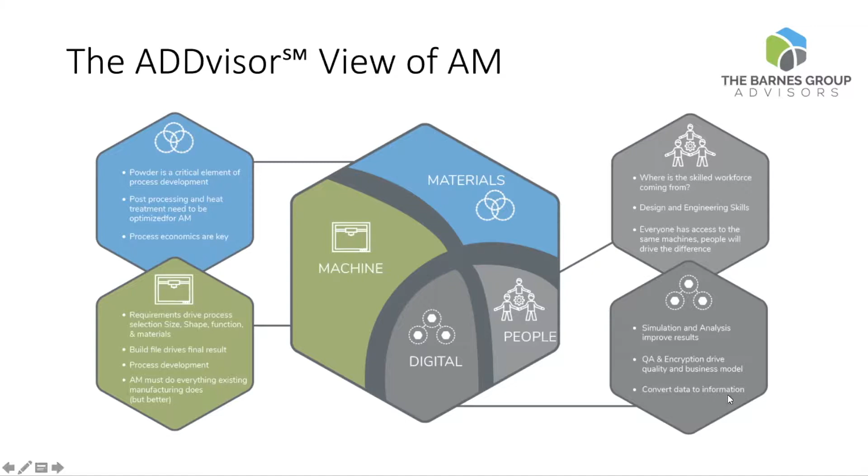So we talk about additive as a team sport. It's a very integrated capability. And if you look at a microcosm of that, just inside any type of powder bed fusion device that's out there, you'll see some combination of physics in terms of the optics, whether you've got a laser or electron beam. You've got an environment, you've got a gas that's going on inside. You've got mechanics of materials as you are building parts. You've got support structure. You've got dynamics going on as you're heating and cooling and doing that repetitively.

Then there's the metallurgy and material science that have to be matched with all of this to make it happen. If the materials aren't compatible, then you're not going to end up with a suitable product. And then there's a lot of the big data that's generated. There's a lot of analysis that goes on, and there's the simulation that we sometimes do beforehand. So this is a function of many things.

And then we've got powder manufacture, flow and spreadability, and that is distinct from material science, because this is basically how you get the material in there. How you produce the powder does matter. And things like how it's going to interact with the recoater blade. How is it going to get into place? How does it get moved around once it's in the bed?

The laser interaction with the powder is critically important. So we know we have to melt material. That's critical. Every degree above the melting temperature adds to distortion and residual stress, potentially. You can also affect your chemistry if you've got high vapor pressure elements. Chemistry can also be affected by the gas pressure and dynamics.

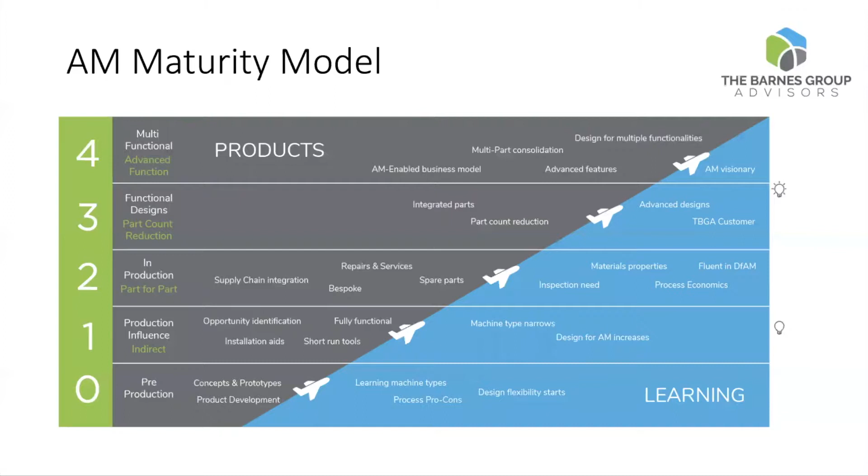So Velo came to us and they said, how do we get faster growth in additive? And what does the industry really want? And so we took this and digested it and said, well, number one comment that we often get is education and training. There's a very small community that understands additive really well. That community struggles, and I would put myself in there, because this technology advances every day. There's new products, new machines, new processes, new materials coming out nearly every week. So it's very difficult to keep pace on all of that.

The training is important because it's about telling the engineers how to design for additive. What is it anyway? There's sometimes the push just to make it with additive when maybe there isn't a strong case to do that. You start with requirements and you figure out whether additive can meet those requirements. And if it does, great. So it's a different way of thinking about the problem for sure. It's a little bit counterintuitive for engineers like myself that have been in industry for a while. We're used to carving things out of rock. We've been doing that for many, many years, going back to the Stone Age.

But it comes into this design flexibility, and that has to have value to people. But in order to have design flexibility, you have to have really good understanding of what your requirements are. And so this is something that we teach in our classes every day. We tell the engineers, you start with your requirements, see what design flexibility you have. And that's where tools like generative design come in, because they run through a rapid trade space to give you an idea of what the structure ideally looks like. And then you need a human in the loop to say, well, yeah, but it's sitting in this environment, it needs to do something special. That's where the design flexibility comes in.

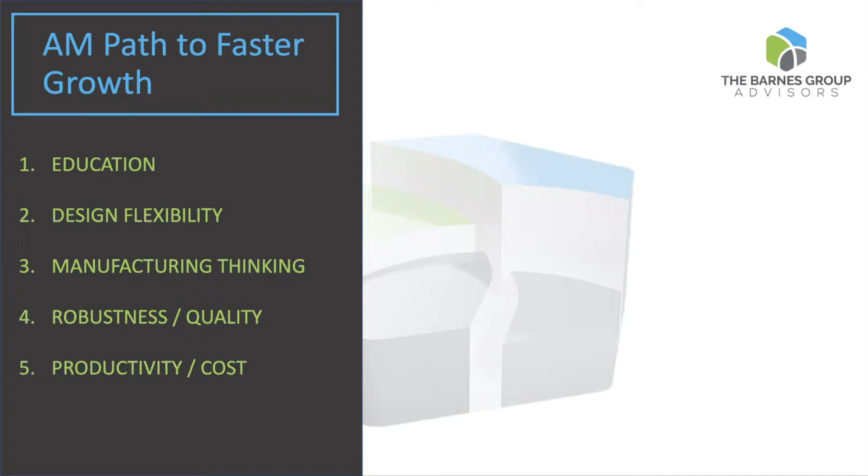And productivity often is cost. It's about being able to print things, I'll say quickly, but efficiently. So we're looking at your dollar per hour on the machine. So productivity kind of disguises cost, because you can have a faster machine, but it might be more expensive. So you have to increase the speed without increasing the cost at the same rate. And that's where you get productivity.

So when I started talking to Velo, what really was interesting to me was this support-free concept that they have. And it really hits on some areas that I think we've been waiting for. It's about that integration of the software, the machine, and the materials. And if you do that right, if you control the residual stress and the distortion of the material while it's heating up and cooling down and heating up and cooling down, that allows you to reduce or eliminate support structure. And that is a big deal, because that's where you get into saving material, saving print time, and saving post-processing costs.

So we've seen the polymers world, polymer additive manufacturing has taken this into account. If they still need support structures, there's been a lot of effort put into dissolvable, water soluble, or just eliminating support structures entirely. So it's a necessity for sure. Certain processes that are out there have gotten away with different ways of solving this problem. In some of the systems that are out there today, you might have a heated chamber to 800–900 degrees Celsius, in which case that really drops your need for that support structure. And that's a different way of solving the problem. It also has some drawbacks in terms of pump down and heating up time, but it's been a great step in productivity.

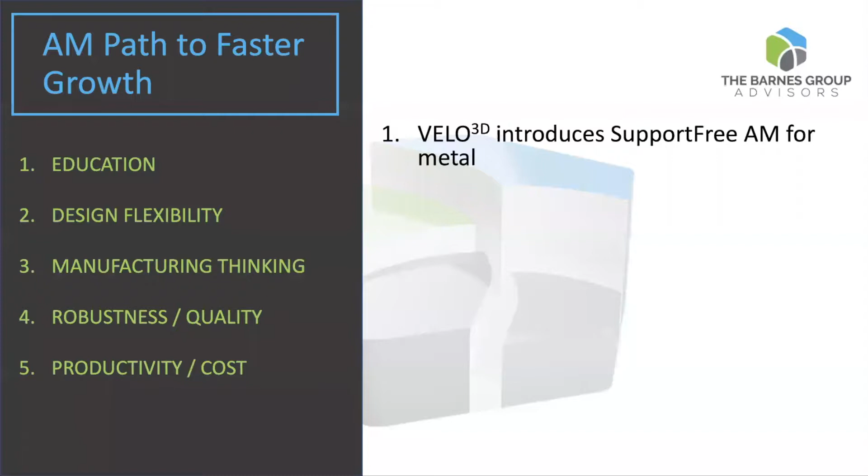And if we look at the polymer world, they're pushing down this path of less post-processing specifically, and that helps the cost picture as a part, more design flexibility, looking at how to do internal structures. The nesting density obviously helps your productivity. And this comes as a consequence of getting better adoption in industrial manufacturing. So in a lot of ways, we can look back at polymers and watch their progression, and we see metal following some of the very same models.

So we see that now Velo has the support free, and again, this is very exciting for our team as engineers, because we think this is just positive for the industry. We think that this moves the ball forward for that upper right-hand corner of the maturity model area. And we believe that this will be very progressive for a lot of companies who've been trying to close a business case, but just haven't been.

The flip side is, it doesn't much matter to that lower left-hand corner. So this is about picking the right machine to do the job. That's how we look at the world. We're engineers, so we like to think that everything has a pro and a con. It's a balance. We're in equilibrium. You try to choose the right tool for the job. But we see this as a tremendous benefit for pushing the field forward.

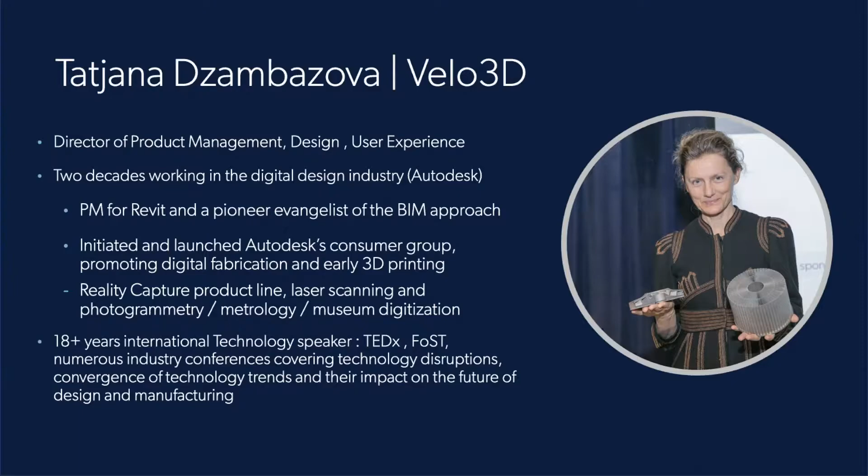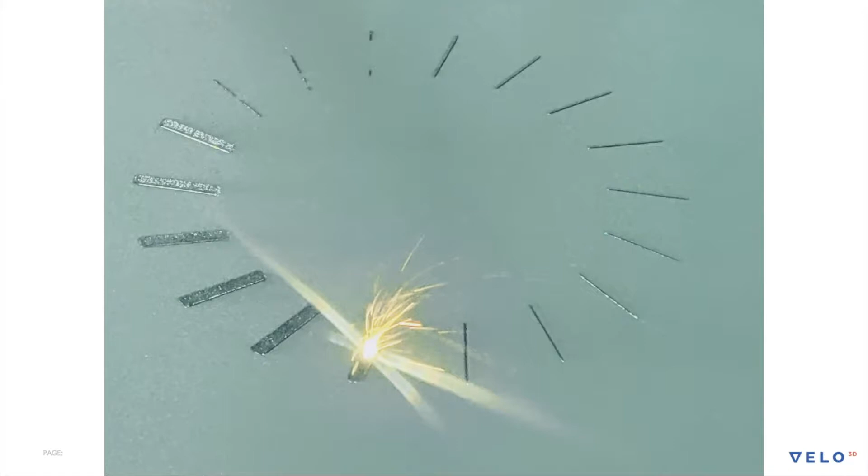Thanks, Mike. Hello, everybody. And John, thank you so much for sharing your insights and experience, and for laying out the challenges as well as the opportunities of additive manufacturing. Additive manufacturing is indeed quite fascinating. It's exciting, and it's a true game changer for manufacturing. And we are already witnessing the polymer additive world moving from prototyping and tooling towards final production with additive. But the metal additive is still a little bit behind. It's still not yet fully there to be recognized as a reliable, reproducible, production quality manufacturing method.

So why is that? As John mentioned already, metal processes are much more complex problems to solve. Metal powders can be explosive, reactive. Powders change characteristics in presence of oxygen. They need super high temperature to melt. Melt pools on their own are hard to predict and control.

And then the whole cooling and heating results in plastic and elastic behaviors that can create failures and deformation opportunities around each corner of the process. You can really think about metal printing as a sophisticated form of welding. And you know from traditional manufacturing that welding is really kind of the weak link.

As a consequence of this complexity of the process, consistency, quality, and dimensional accuracy are still not there. The idea to production cycle still takes too long. And the much hoped for, but limited, design freedom is still an unsolved problem.

These were the very facts that motivated Benny Buller, the founder of Velo3D. So in 2014, he understood where metal additive is, what metal additive can potentially solve, and he really wanted to tackle these issues. So he started Velo not in order to make yet another metal additive company, but rather to start addressing the root causes of these unsolved issues and limitations that hold back the whole industry and metal additive from becoming a production quality recognized manufacturing method.

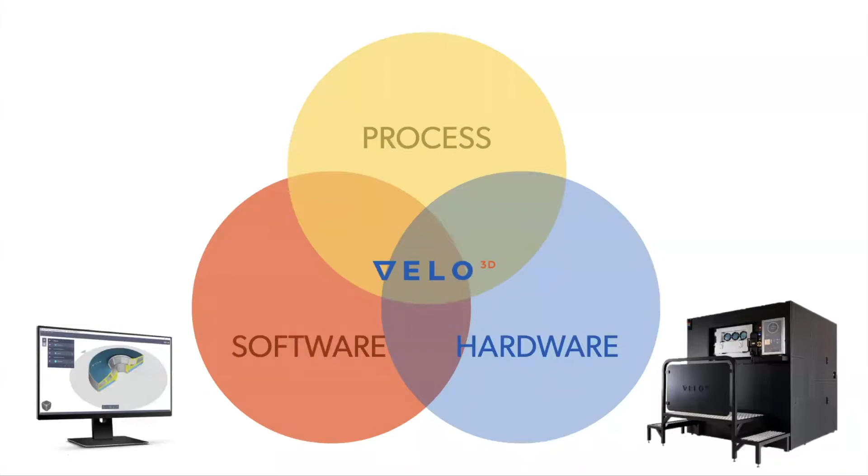So there are many, many innovations within the hardware. We have worked on a closed loop melt pool control unique to powder bed fusion. And then we have sophisticated process-aware, simulation-driven software, which in combination with the process and the hardware really creates a solution that enables users to make anything, while at the same time assuring the missing quality and consistency of metal additive. So we managed to introduce our breakthrough technology called support-free.

So before entering into what Velo does for support-free, let's take a look at what support-free is, or what supports even are. In the polymer world, supports usually mean just that. They are physical supports. They're simply trying to defy gravity by preventing parts from collapsing during printing. But the word supports in metal additive does not quite apply.

In the world of metal, where we weld and then have rapid solidification of melt pools that create residual stress, supports serve two other purposes. One, and most important, it anchors the part. It restrains the part and keeps it from moving up, which is basically what happens with thermal distortion. And it also serves as a heat transfer, so that the next layers of the print don't come on molten lava, but the heat is transferred properly.

So John also mentioned that when it comes to supports in the polymer world, technologies and methods have been developed to deal with removing supports, which is a big part of the work, right? They're dealing with sacrificial and dissolvable materials. And that works for polymers. In the metal world, that is early research that will not be reality for a very long time.

So temporary support structures that are physically attached to metal parts are the inconvenient necessity of metal printing and are really a big problem, because they not only require a lot of post-processing and machining operations to remove them, which adds time and cost, but most importantly, they limit the number of designs that you can actually make with the current systems.

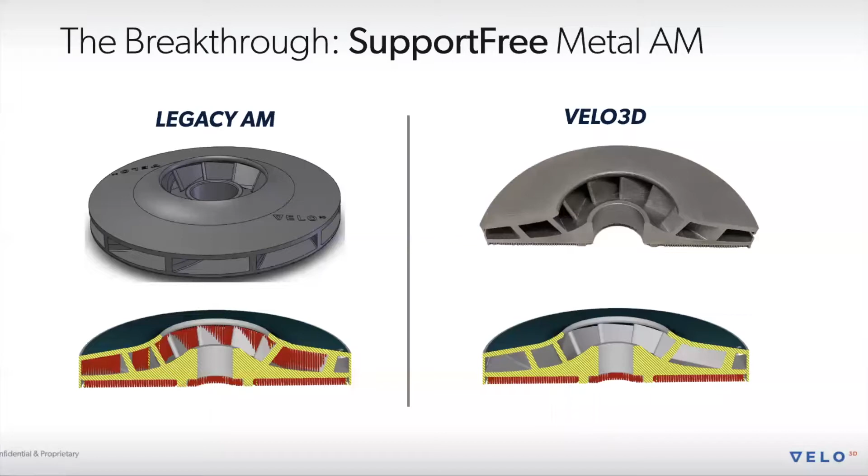That is what we call support-free. Now, if that is support-free, what are the implications of support-free?

Basically, we are going to look through 4 lenses: how support-free helps in acceleration of the development time, because we know that in manufacturing, it's all about shortening the development time. Additive manufacturing was started as rapid prototyping, but how can we arrive to rapid manufacturing?

The possible: I always joke that if you tell an engineer that something is impossible, they will prove you wrong. They will always find a solution. But manufacturing is not only to find a solution, but to find a solution at the right cost. So we will talk about how support-free can help with the cost.

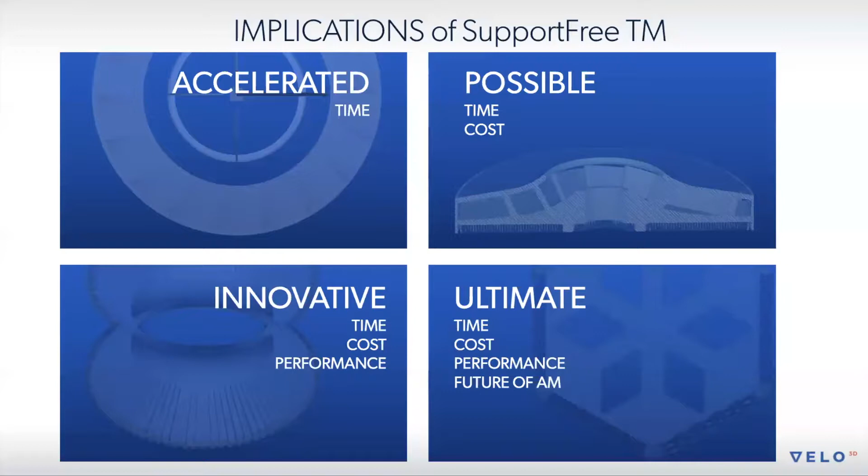Innovative is really about eliminating constraints so that we can start reconsidering design, so we can make existing parts or new parts much more performing. And finally, ultimate is the future of AM, where we really prove that AM can be better for time, better for cost, better for performance. So let's take a look through examples of all 4 of these.

This is a stator ring. This part is a part of a jet engine. So how is it made today? In traditional manufacturing, it's quite a long multi-step process. You first take a block of steel, you machine the internal ring, the hub, then electrochemical machining for each blade, then you separately machine the outer ring, and then you weld them together.

Sounds simple, but it's a multi-step, multi-iteration process, and it's mainly the reason for long development times, and it's very prone to long lead times, because welding and casting sometimes have more than 6 months lead time. With current additive manufacturing systems, you would need to support all of those blades, as shown in red on the image. This means you need to remove them afterwards. These are very often hard to access and thus hard to remove.

To arrive at a functional stator ring in this case, you would need to go through a lot of design, prep, print, post-process iterations. You won't succeed the first time in arriving at the part that you need. So this results in long development time, long time to production. So how do we do that?

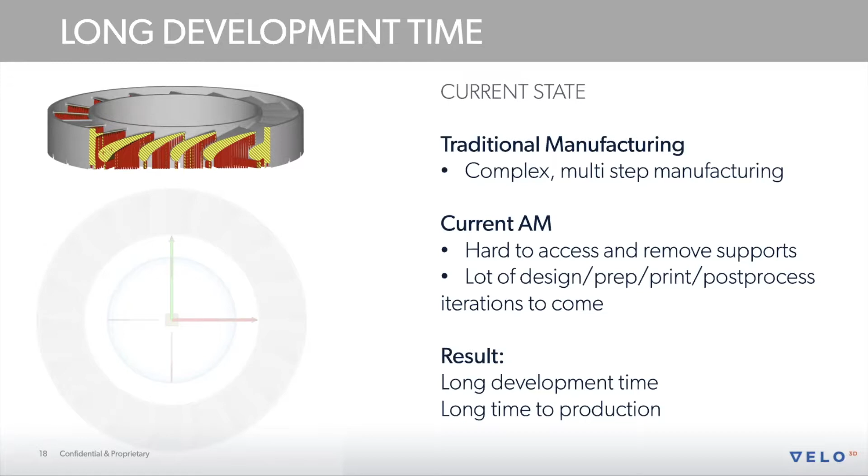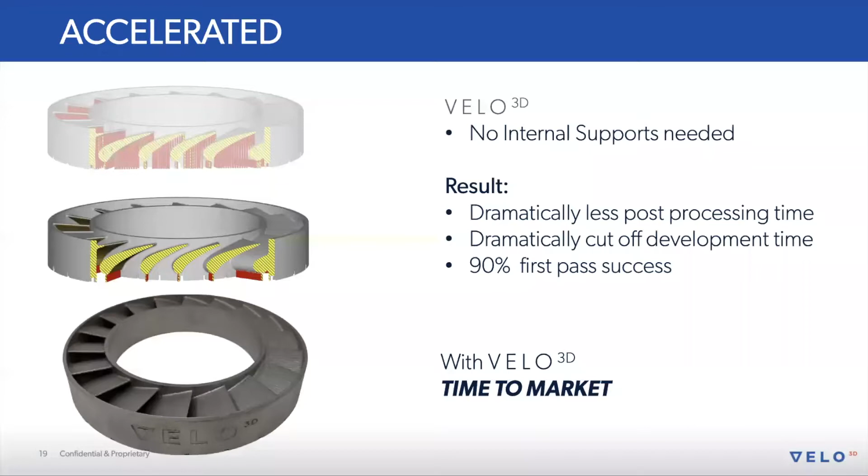Well, if you see the second image, you can tell that we only really need supports at the bottom of those blades. And by the mere fact that we do not need internal supports with our system, we use dramatically less post-processing time, we dramatically cut the development time, and we have a 90% first pass success for each part. So when we talk about time to market, this is how we accelerate it with the support-free capability.

The second one is about possible. We'll go through an example of the shrouded impeller that I already showed. In traditional manufacturing, again, this is a complex multi-step process. You first use a multi-axis machine to machine the component, then E-beam to weld the shroud, and then you weld everything together before the final machining. There are different lead times associated with each process, and this results in multi-step, complex, low-yield manufacturing.

If you look at conventional additive manufacturing systems that currently exist on the market, this part will simply not be possible to make, because this is a fully enclosed part, and inside you would end up with lots of supports, because all of those top surfaces are low; in this case, this is a 10-degree shrouded impeller. So this will be just a forest of metal supports inside the part that are so hard or clearly impossible to clean.

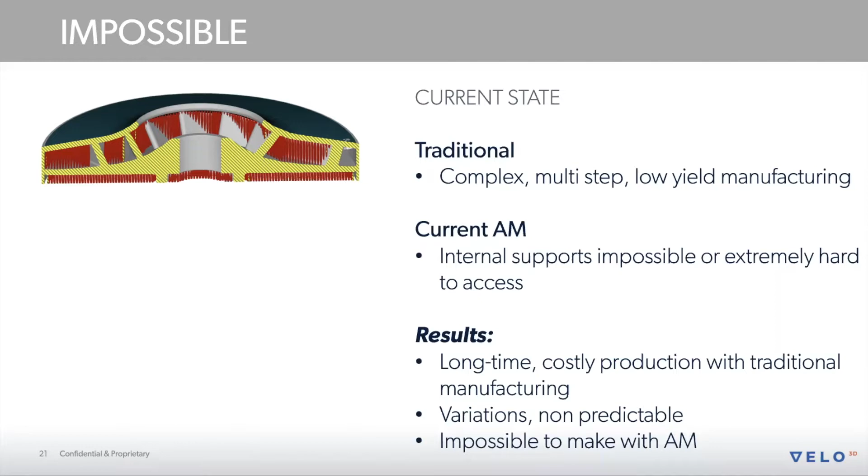The result: long time and costly production with traditional manufacturing, and with additive manufacturing simply impossible to make. So how does Velo do it? Again, as in the previous example, we do not need any internal supports, which dramatically puts the cost down. The yield is higher and it's possible and affordable to do it with AM.

Now, when I first showed some of these parts to a couple of my friends who are engineers, they said, oh, but I can machine this, I can machine an impeller. The thing that we don't talk about is, number one, yes, you can machine it in the same material, but we're talking here about one machine, one process, much more predictable, much more efficient.

But the other side of the problem is that current machines can deal with materials like stainless steel, aluminum, etc. But Inconel and titanium, two materials with specifications and characteristics that are highly needed today and that other materials don't have, are extremely difficult to machine. Inconel has very good strength under high temperature. It has very good corrosion resistance.

It responds very well to low temperatures, like liquid oxygen channels, etc. On the other hand, titanium has a phenomenal strength to weight ratio. It's biocompatible. It also has high corrosion resistance, which is super important for the medical industry. It also has high elongations.

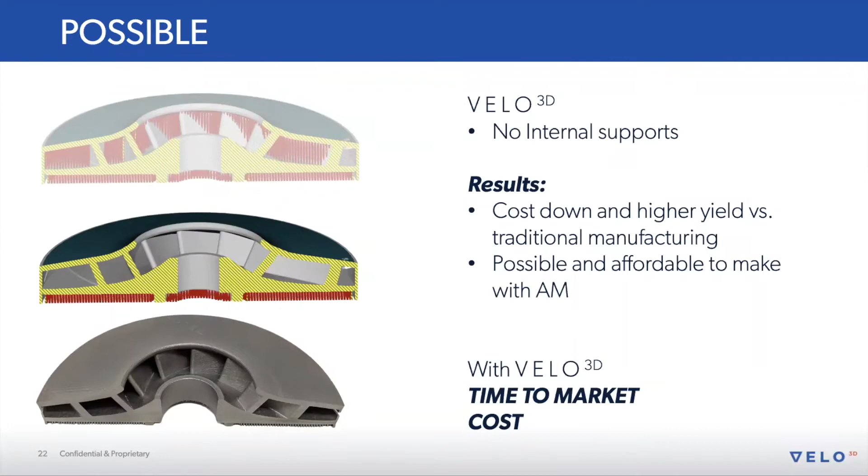So when you look at how you make parts with these two materials and try to do them with traditional machines, this is extremely difficult. They very often break the machines, or you have to do everything so carefully and so slowly that at the end of the day, the time and the cost do not pay off.

The third example was about innovative. And when we introduce new manufacturing methods, they should better promise possibilities for innovations in our products. And additive surely did that. The reality, however, is that due to the many constraints and limitations of the current additive systems, designers who are using additive today have kind of learned to live with those limitations. And they only design within that allowed space. But that is really underuse of the possibilities of AM. AM can do so much more.

And it is needed to do more because our world has growing needs for new, better solutions, for better performing products. We need to use less material. We need to waste less energy and fuel, to do better medicine, etc. We need innovation. So the example that I have on this slide is a regeneratively cooled rocket nozzle. And this part has been around for about 40 years. It worked well, but there are always opportunities for improvements for parts, right?

So this part traditionally was made by basically brazing copper tubing, which is a relatively long process. This now can be optimized, made with additive, and it's optimized based on the manufacturing capabilities of additive. So we're talking about using this new technology to create better performing parts. And there is a more interesting side of this where I'm, as a designer, very excited.

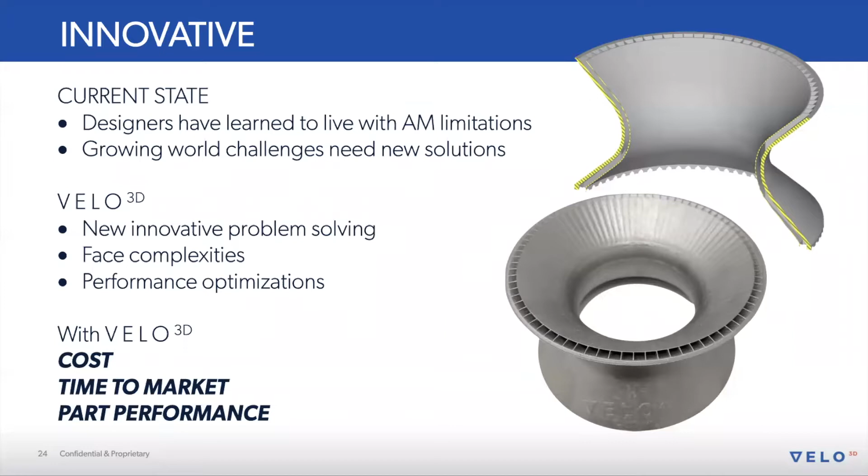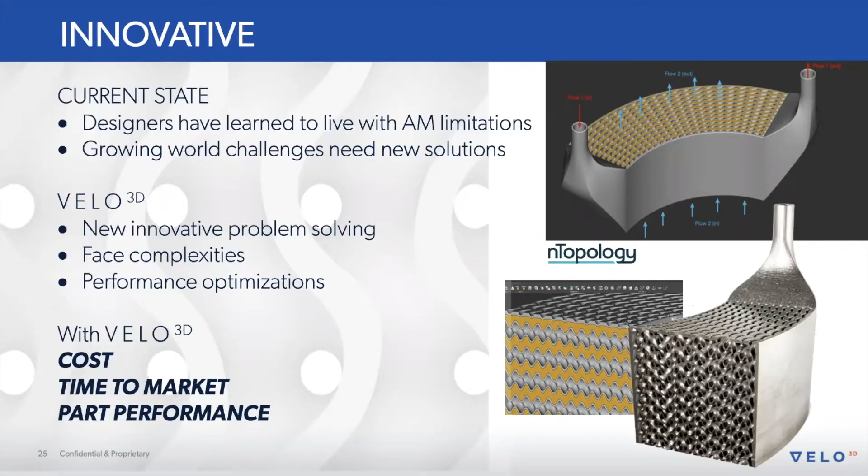And we could put about 400 of these within the entire build volume and print them all together without them touching each other or supporting each other. This is truly unique to Velo. This is part of the vision of additive manufacturing, but basically the full vision is really, can we bring additive to the level where the cost, the time to market, part performance, and also this vision of put a digital file in the oven and a functioning part comes out.

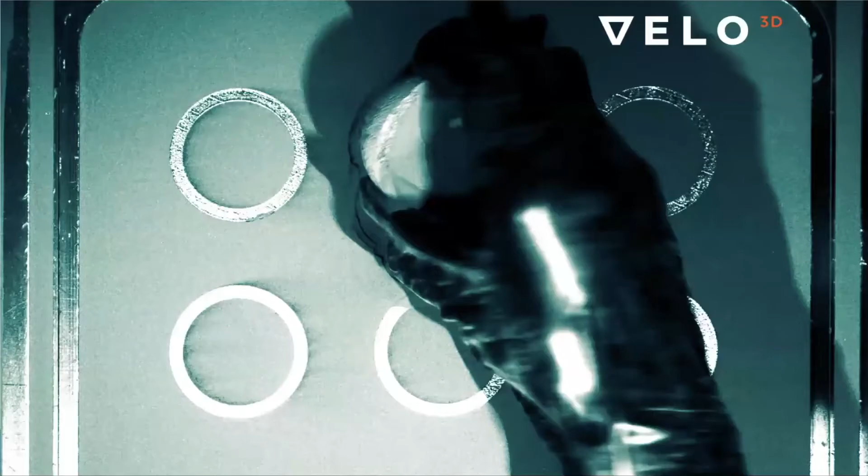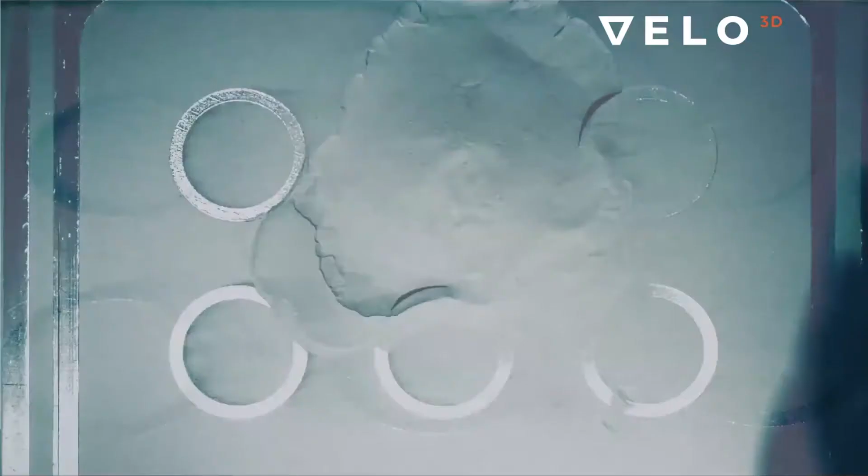And just so you can imagine what this means, here is a video of us printing an acetabular cup, a hip cup. It's usually the part for hip replacement. And it has been done with a lattice structure on the surface for good osseointegration. As you could see on the video, maybe we can run it again, these cups were printed next to each other and on top of each other.

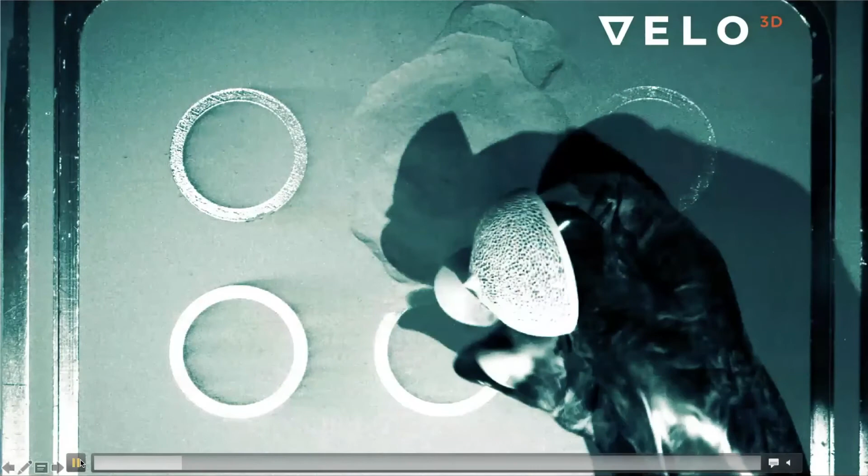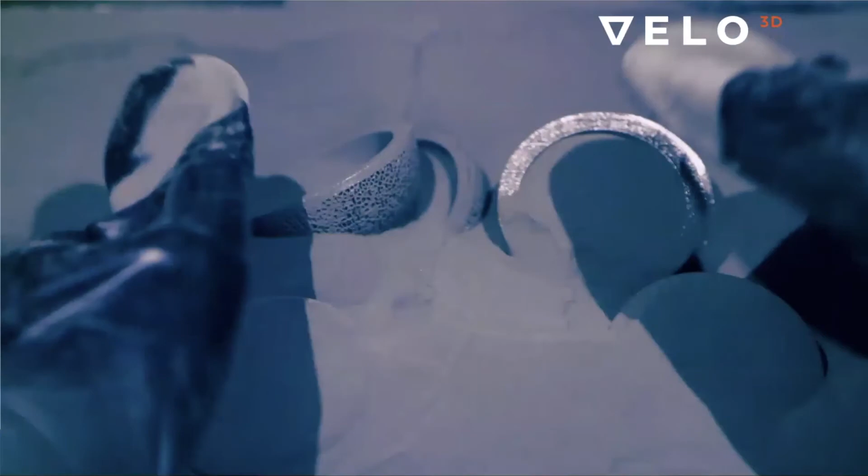And this is after printing, we just take them out and the parts are ready. There were no supports, no removals. Post-processing is minimal, just general post-processing, so it's a highly efficient process. So instead of a maximum of 12, which, for example, other systems would have been able to build at the same time, we could build over 400 of those.

So that's what we can do. So how do we do it? If you have ever been trained in additive manufacturing or design for additive, you have probably been told many things about unsupported angles, unsupported overhangs, bridges, about minimum feature size, about maximum wall height, etc. For a technology that was supposed to enable us to unleash creativity, there are way too many constraints at the moment. So we at Velo tried to remove some of those constraints.

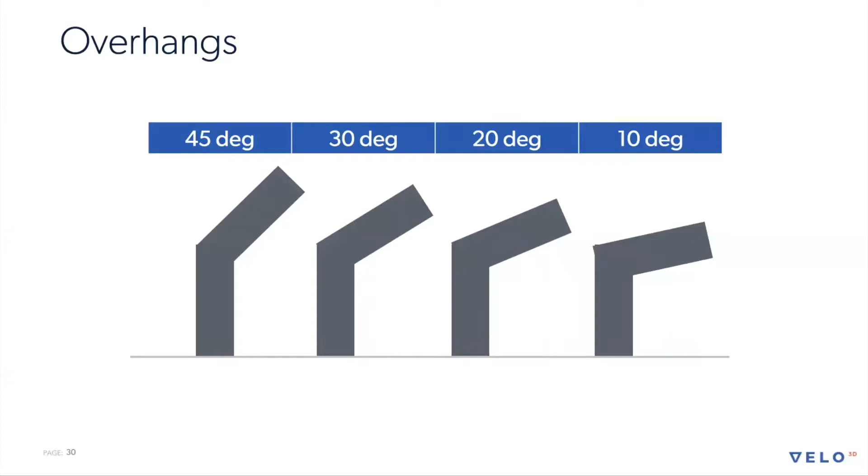So why is that? The process starts to become unstable. There starts to be roughness on the down-facing surface that increases with the lowering of the angle. And the parts curl up and often will clash with traditional recoaters, which is yet another problem.

So here is how we do it. This is our sample part. As you can see, not only can we do it without supports, but if you look at the down faces of these samples, the surface is impeccable, and in many cases it does not require any post-processing. And very important, we do this with a standard powder. We do not create anything special, no special powders, no special dealings with the material. It's off-the-shelf powder.

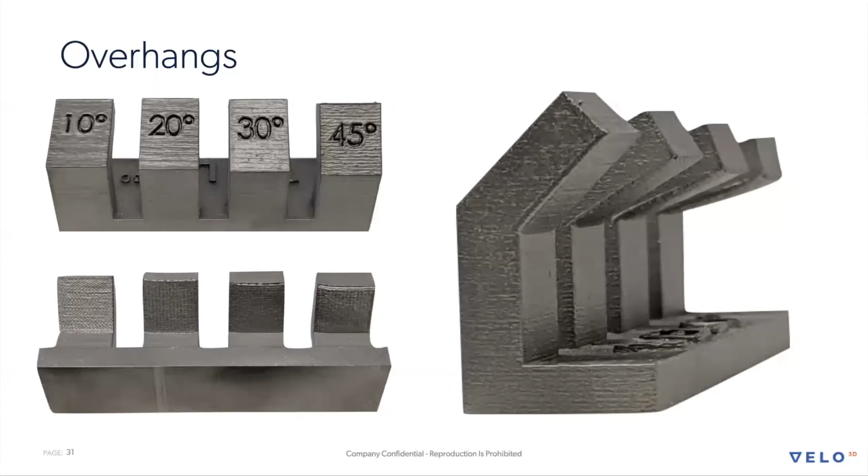In this case, not only did the blades not have supports, but these lattice structures designed, again, with nTopology are highly consistent. Yes, other additive systems can make lattices. That's not the problem. The problem is that they really need to be consistent, and that is usually a problem with other systems.

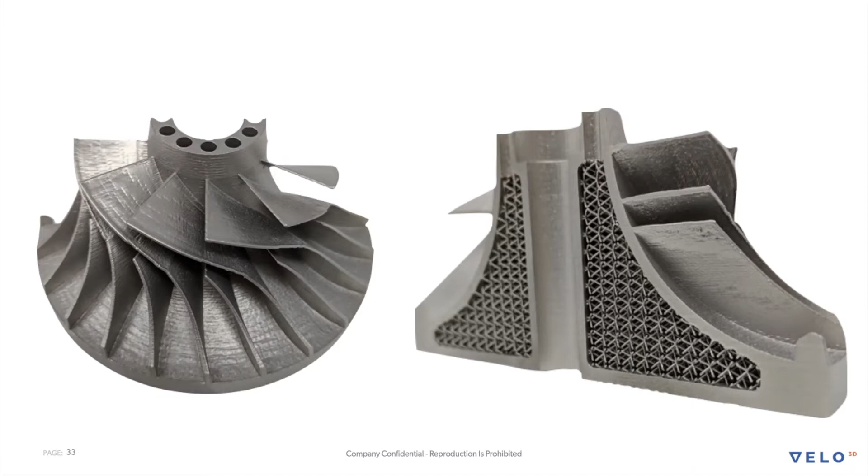The next technical challenge that we solved are large diameters. You will also have learned that if you have large inner diameter channels, you can print only until 8 to 10 millimeter diameter without supports. Everything else, you need supports, or I've seen strategies where engineers are required to redesign the interior cross-section of those diameters in a teardrop shape. We at Velo have managed to push the limit to 100 millimeters in diameter without supports, or even bigger, depending on whether the part allows to be oriented on the build plate.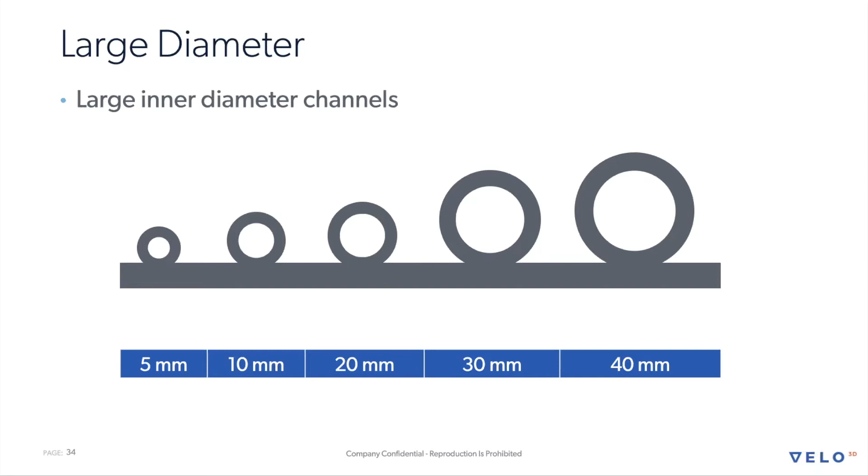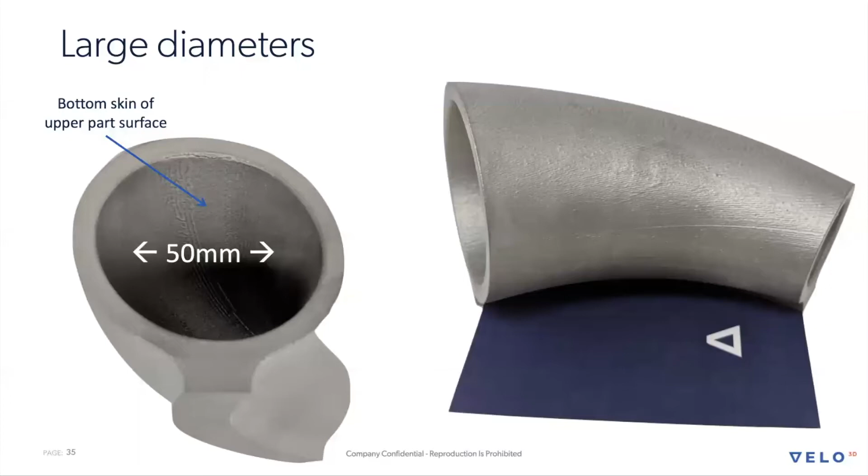So here is a part that we recently printed. By the way, on the right side, we should have put a coin. This is a business card, just to give you a sense of how big this part is. But what's really important about this part is not only that it's printed 5 centimeters or 50 millimeters without supports, but that the bottom skin of this upper part of the surface is really impeccable and it does not require post-processing.

Another problem that you will often hear about is the high aspect ratio. Why is this a problem? Well, different systems have different recoaters. They can be hard recoaters that are like blades, or soft recoaters that are like windshield wipers. There are also roller recoaters. Regardless which, they are like bulldozers pushing powder on the print bed. And when you print a long and thin high aspect ratio object, they can clash with this object and move it, and then obviously the build fails, but very often the recoater itself would also need to be replaced.

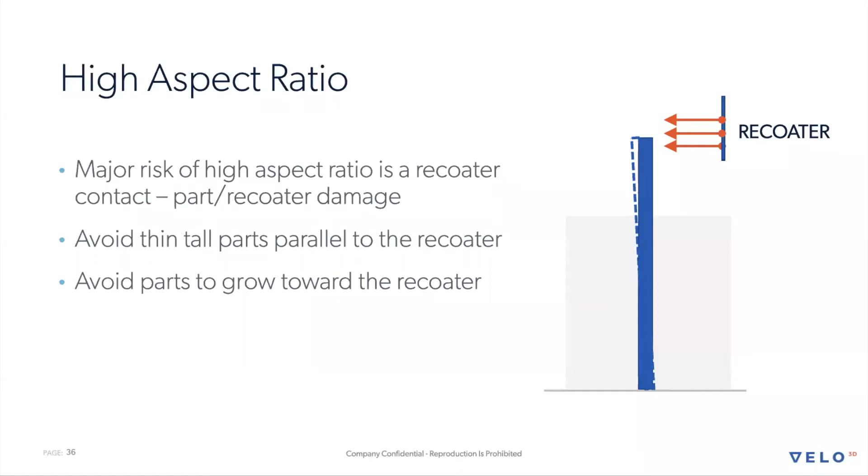At Velo, we invented a non-contact or contactless recoater to avoid these failures, and also not to have to worry about orienting a part never to be parallel to the recoater because that's the only way in which it won't fail. Here is an example. This is also a heat exchanger that, due to the design, will inevitably have at least 2 fins parallel to the recoater, and only due to our non-contact recoater, we remove the potential for damage and are able to print high quality parts that look like this. And by the way, I heard that in the industry, the aspect ratio that is possible today is somewhere around 40:1.

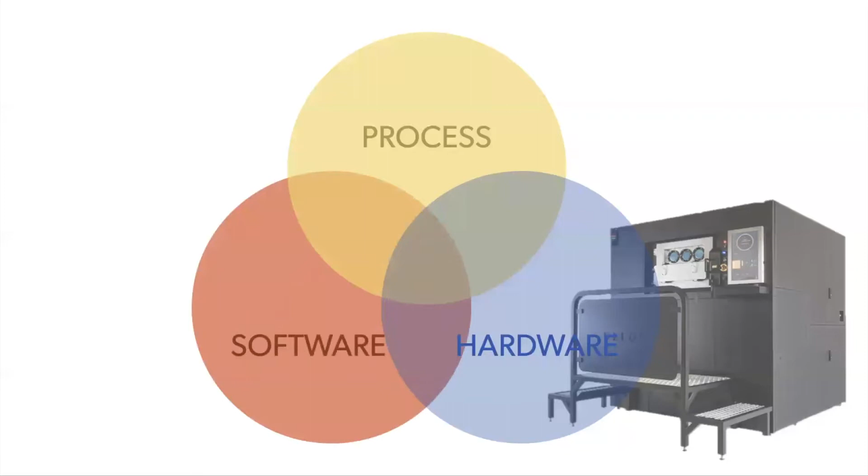Don't quote me because I'm not sure if it's correct. We definitely can say that we can do 500:1 ratio. So that's what we can do. And how we can do it, as said, is by creating a very integrated system of process, software, and hardware. The software is not an afterthought. It has been designed by being process aware, with the input from the process, and then it's driving the hardware that then delivers the value propositions that we showed.

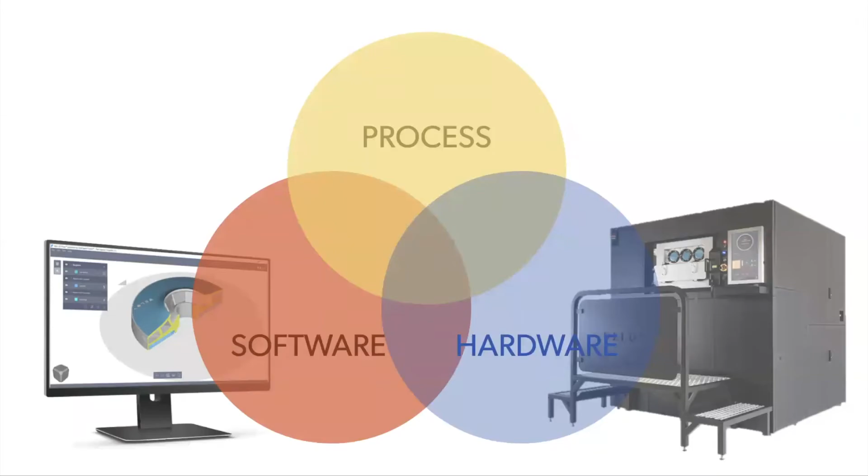A few words about the software and the hardware. The hardware, we call it Sapphire. It's a powder bed fusion. It has a 315 millimeter diameter and 400 millimeter height build envelope. It has dual 1 kilowatt lasers. The contactless recoater and our own controllers are just some of the innovations. There is much more to talk about, probably in another webinar.

But most importantly, the entire system is sensorized, with integrated in situ process metrology that allows us to have a true closed loop melt pool control, and thus know what is coming to the printer, and if it is not what's expected, the printer can self-correct on the fly or stop if there is an issue, or deal with the issue. That's why our failure prediction and risk in general for failure is very low.

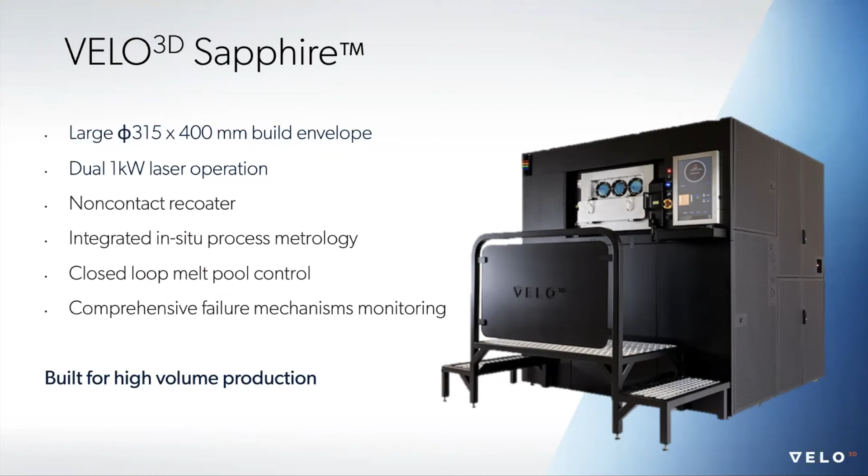The entire system, as said, is built for volume production, and we tried to really marry the best concepts of powder bed fusion and EBM, which is around precision, surface control, dealing with multiple materials and high temperature processes. When it comes to the software, I'm happy to report that you're the first people in the world who are seeing this. We are actually launching our software next Tuesday. It's called Flow.

And Flow is not just a print preparation software in terms of support generation and process overrides and smart selection, but it's really a technology bundle of 3 technological components. One is the print preparation environment, where you would be orienting the parts, applying supports and processes, and dealing in a very smart way, because we decided to break with the mesh workflows that are the industry standard, the STL file format, and decided to work on a native CAD workflow where you actually work with original SolidWorks, CATIA, name it files, or STEP and XT files. So this is something that we're very proud of, because it enables you to work in a much smarter way, and you can see a little bit of that in the video.

The second part is the simulation aspect of this. We have built a simulation engine inside Velo, and this simulation engine helps both predict the print outcome, then apply deformation correction, knowing what that outcome would be, so that at the end we get the part that we wanted to get, and finally also helps with failure prediction throughout the entire process.

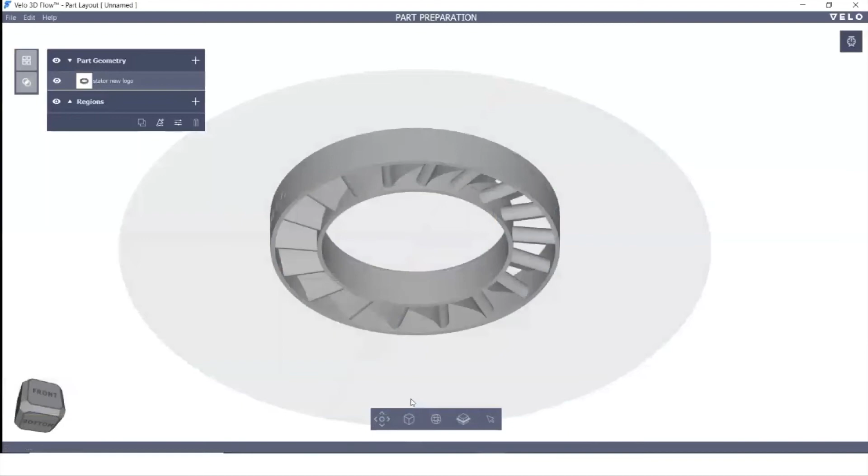This is how the software looks when you start. This is the dashboard. You import the original CAD file. We do not convert it to a mesh. You're dealing with actual smart CAD. Here is an angle overlay that is often a good strategy for thinking how to select surfaces for supports. Here is a smart selection. What did I mean by smart when I said it's smart to work with CAD files?

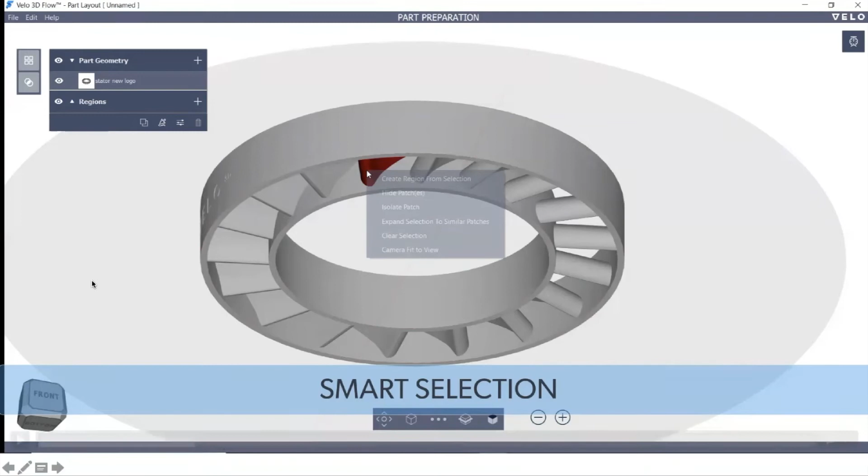Well, let's say I would like to select all the blades on this stator ring. All I need to do is select the patch mode and select one of the blades, and then just ask the system to find everything similar. Here it is. This usually takes hours to make in other software. Then we introduce the concept of regions to organize the work. They are saved selections that help me then apply supports or apply processes.

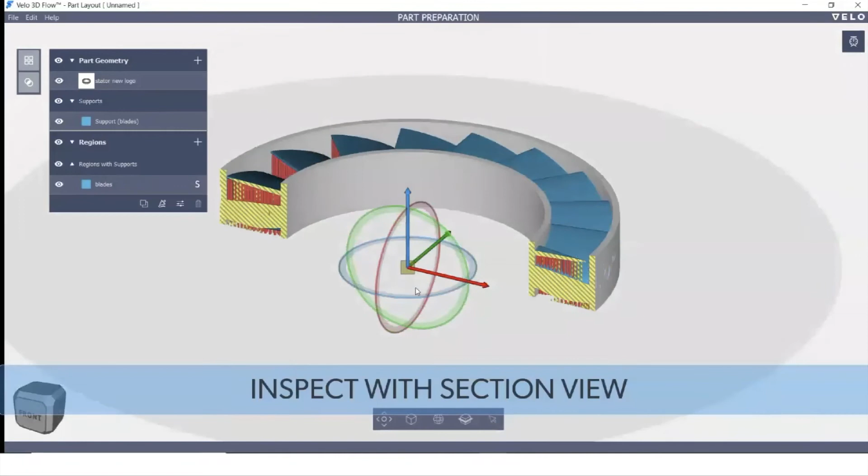So here we are, we applied supports. Let's inspect with the section view to see where all these supports arrived. Well, there is a forest of supports that actually Velo doesn't need here. So we will just reassign where the supports are needed. In this case, we'll just tell 10 degrees or 15 degrees or 0 degrees, whatever, and the system immediately updates. This was not sped up. This is how fast the software actually is.

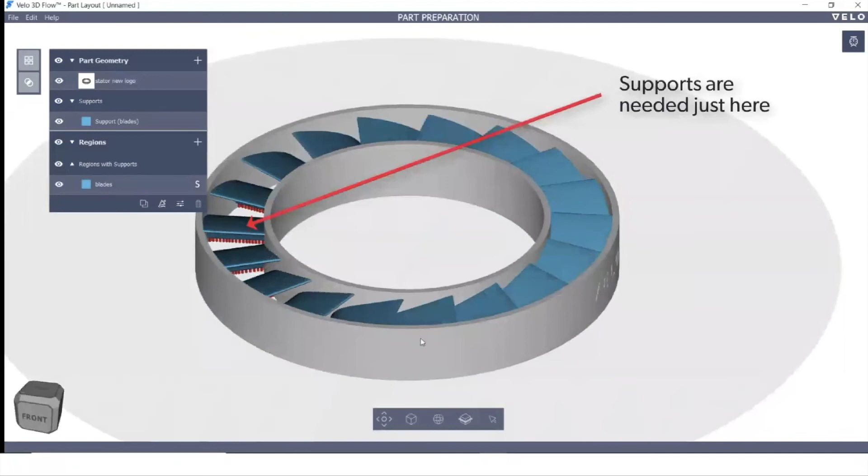Then we can use the same method of regions to apply processes. I feel very strongly about this. We have an amazing process group, and we decided not to ask our customers to be the research lab people who are then failing and trying and testing until they arrive to success. We are doing the testing, we're doing the failing, and we provide you with processes that you can easily apply to the whole part or override per surface.

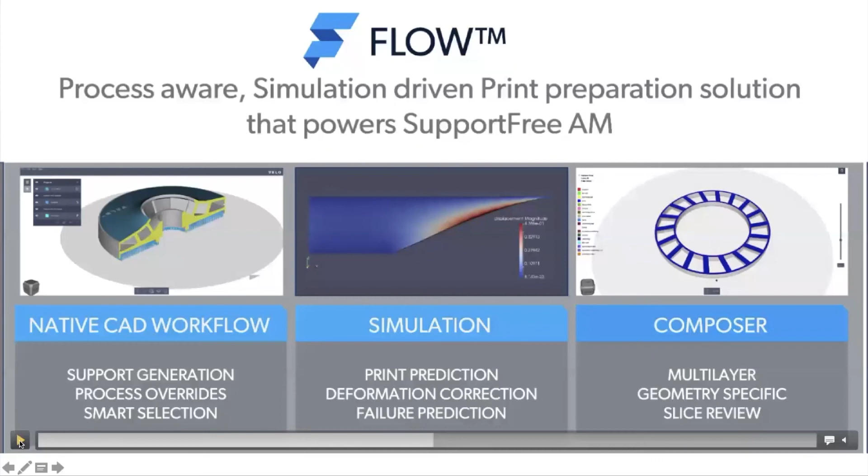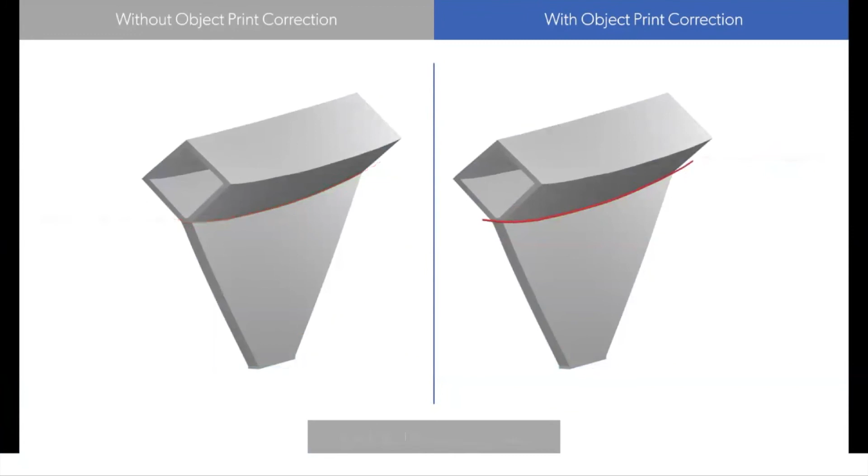The second part of the software is the simulation aspect. You are not going to see the simulation part of the software anywhere. It runs in the background, but this is what it does. It predicts how a part will deform. The part usually curls up. Then it applies this counter correction, counter deformation to the part.

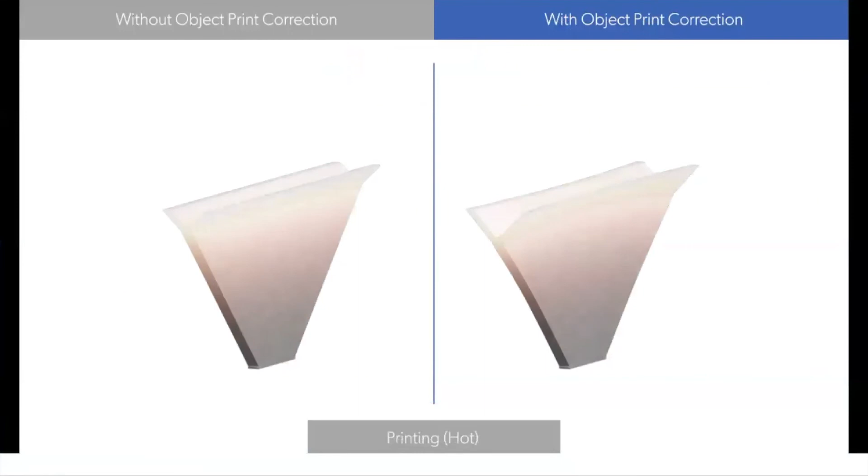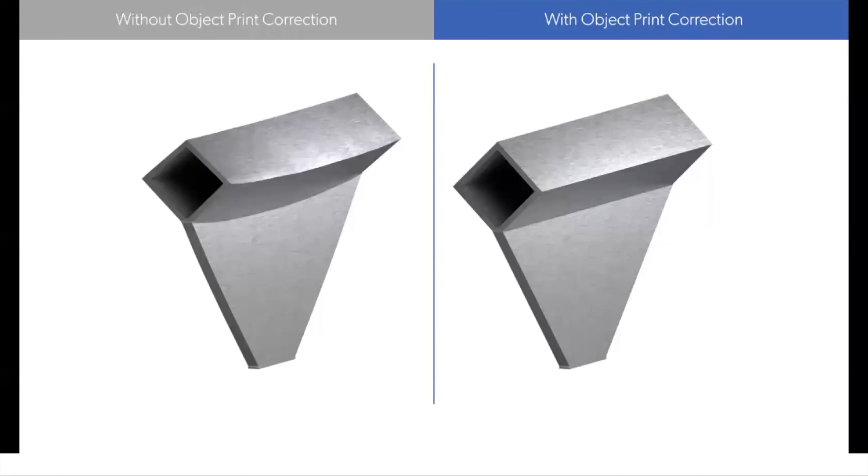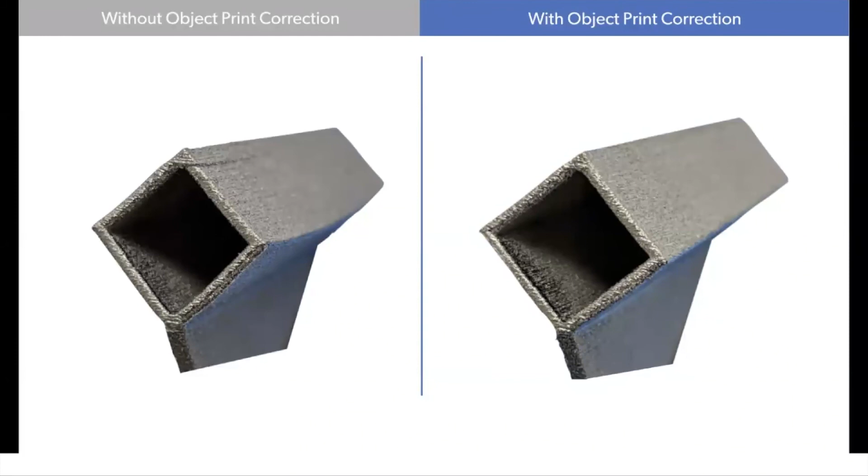And then when we send these two parts to the printer, the left one was not applied to deformation correction, the right one was. After cooling, the right one shows correct and the left one will be curled up. We are very proud of this simulation engine and object print correction utility because, as you can see on the examples, it really helps arrive to the quality and dimensional accuracy that is required.

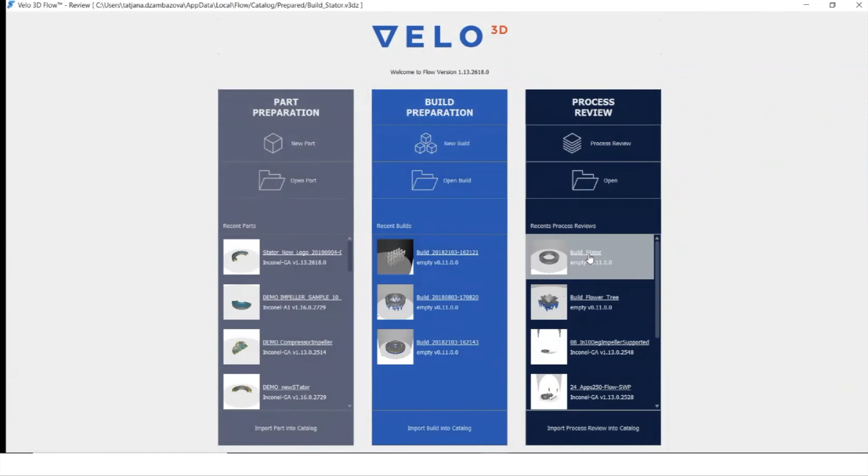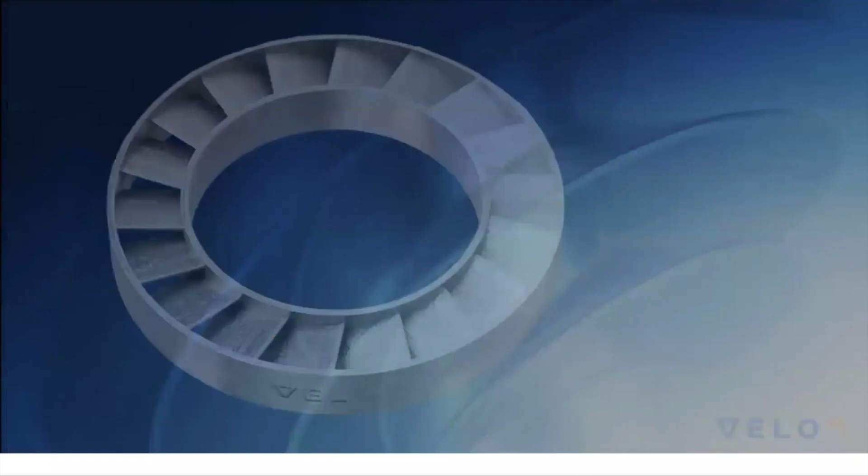And the last part, the Composer, also works in the background during the part preparation, but it allows you also, after the part is sliced, to review a bit the processes that have been applied layer by layer, not only in 2D mode, but also in the context of the 3D part. You can also look at the laser assignment or the print order and see if you got what you needed. Here is the printed part.